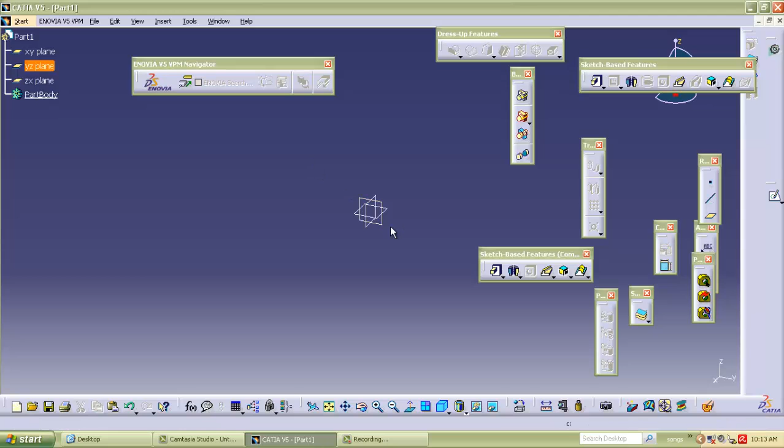First selecting the preferred plane, so I am selecting this XY plane and then making a circle, choosing a circle from the profiles available in this workbench. Then making it constraint, set to 200. You have to make constraints because no design is complete without constraints. Then exiting the workbench, making it 20 mm, and choosing the upper plane.

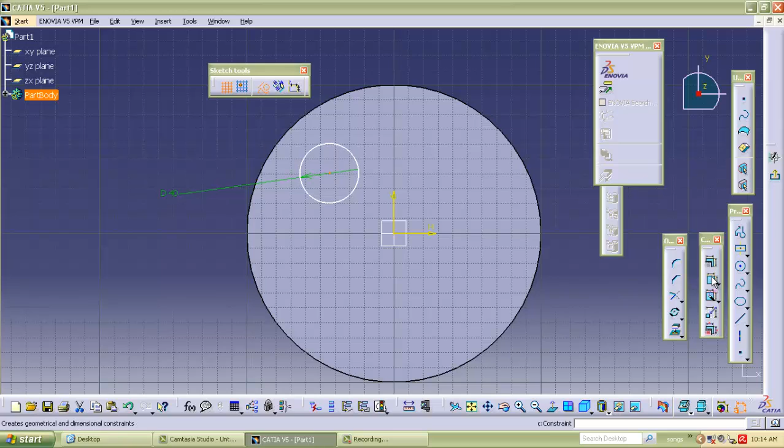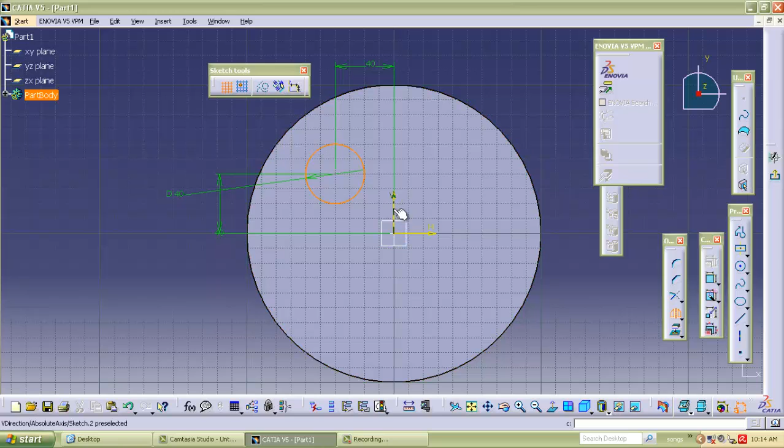Now we are going to make the eyes of this smiley. Making constraint, this one should be 40, and then again making constraint, should be 40, and this should also be 40, making it 40 again. Now using the mirror operation, this uses a sketch which we want to mirror, with this axis, so it gets mirrored and already constrained.

Exiting the workbench, then using this pocketing function and giving it 10 mm. Then selecting the plane inside this pocket and making the eyeball of this smiley, then projecting this part.

It will be projected in the lower plane, you can see this. Now making the eyes of the smiley, setting it to 15 mm and then making it constraint again. Then deleting this projecting part since it's not of use.

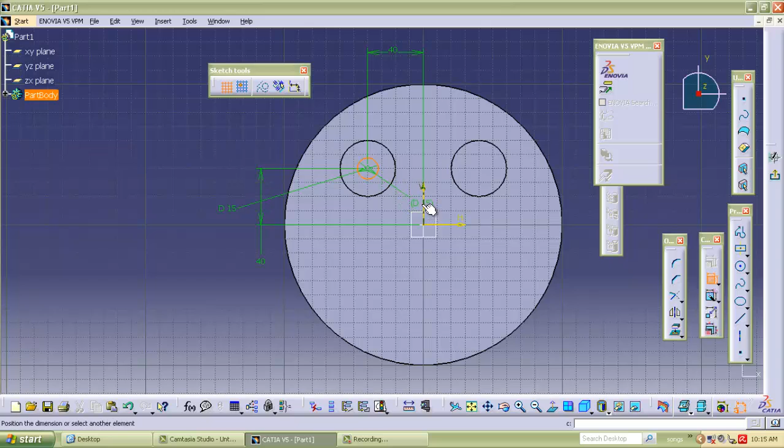Making it mirror about this y axis, when it is already constrained. So using this extrude function with reverse direction, which reverses the direction of extrude, and then setting it to 12 mm.

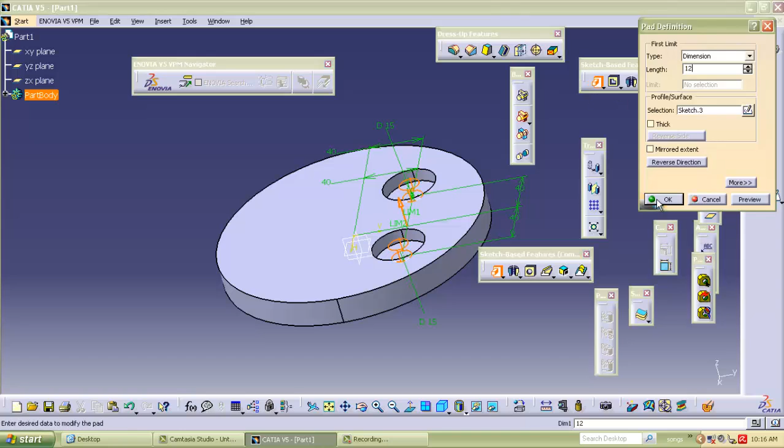Now the eyes are made, so selecting this plane and making the nose. Here we can use a centered rectangle to make the nose of this smiley. So here we choose 45, and this dimension is 16.

Again we have to position it by giving proper constraints. So here we get 8 mm, and then here 22.5 mm, so now it is properly constrained.

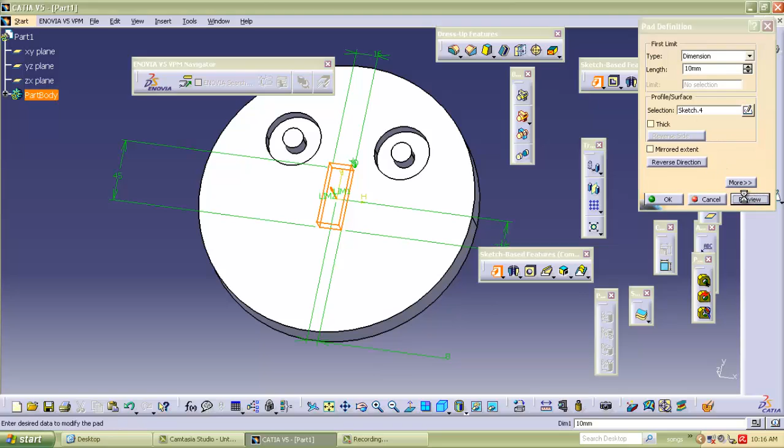Exiting the workbench, then giving it the extrude function, setting it to 10 mm, and here we get this smiley face with the nose, and then giving it a smile.

We can go again to sketch, giving a point. Here we can position the point. This should be 50, 45, and then the other one should be...

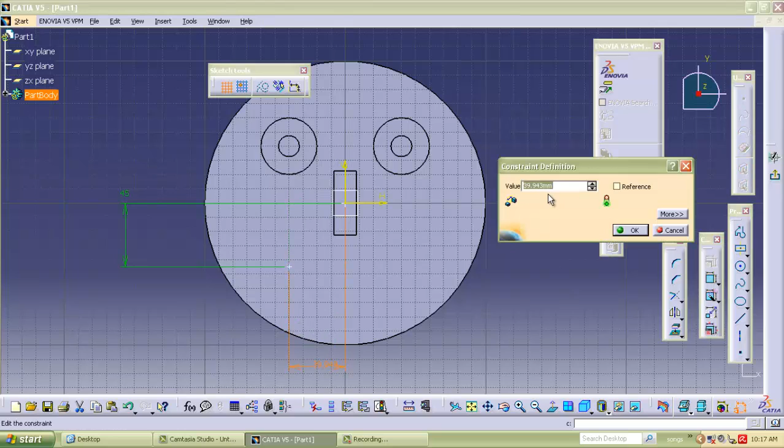Selecting this dimension part, and then this should again be 40. Now this point is positioned.

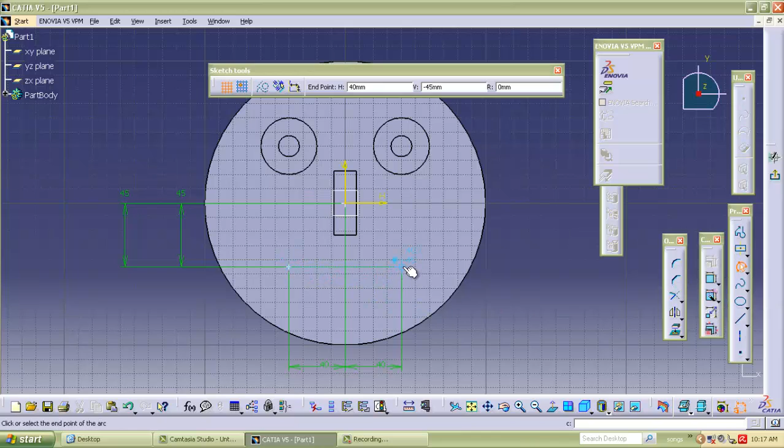Using the mirror command, we can mirror this point, and now we can use a 3-point arc. This 3-point arc starts with limits, because we have to set the limits first, and now we can change the radius, then making it constraint.

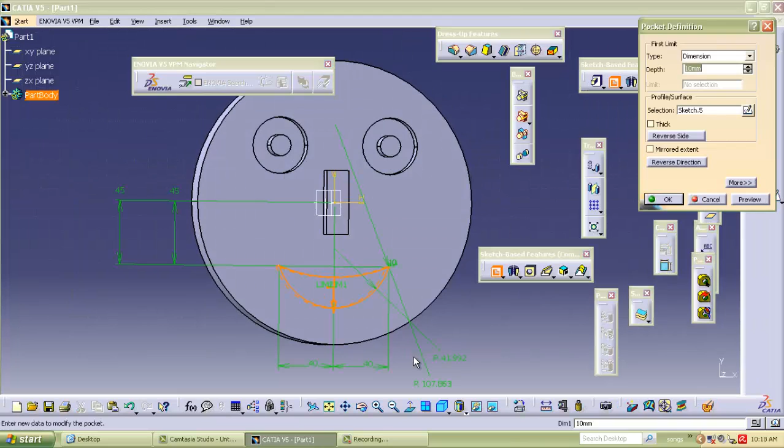Making it constrained again. So here we got the mouth of the smiley, and now we can pocket it to the end, setting it to 20, and we get the pocket.

Now we have completed the face, but we have to dress up this whole smiley face. So selecting this fillet, selecting the edges we want to fillet, we need 7 mm. Previewing it, now it's looking like an eyeball.

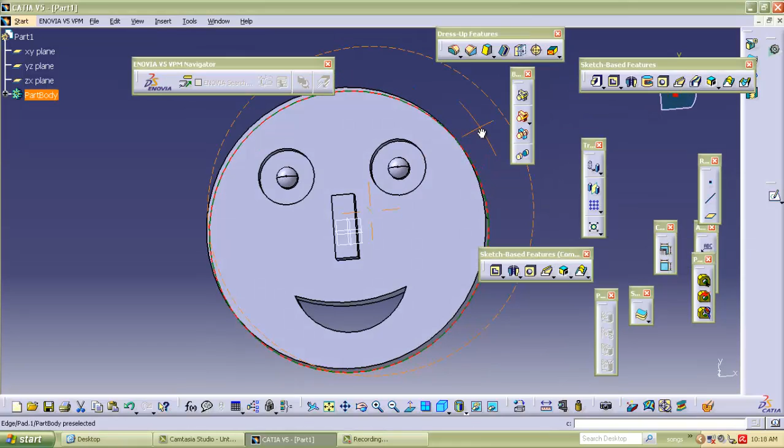Now setting this again, fillet 7 mm.

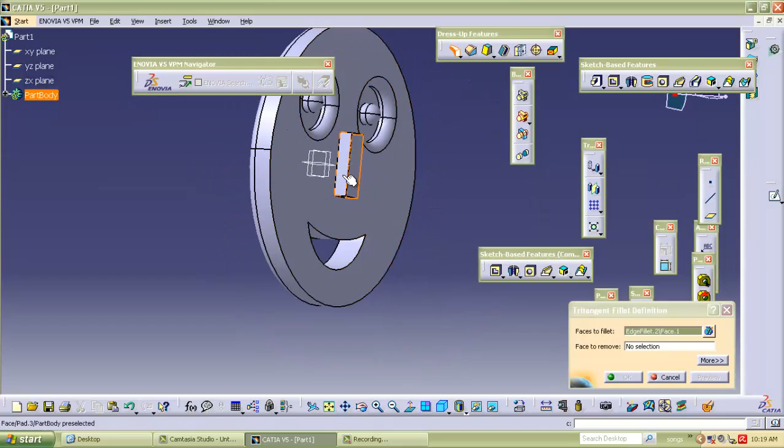Now selecting one more operation because this is not looking like a nose, so giving it a nose-like structure. We have to select the two faces between which we want a tritangent fillet, and select a face which we want to remove. On preview you can see it is removed, so now it is removed.

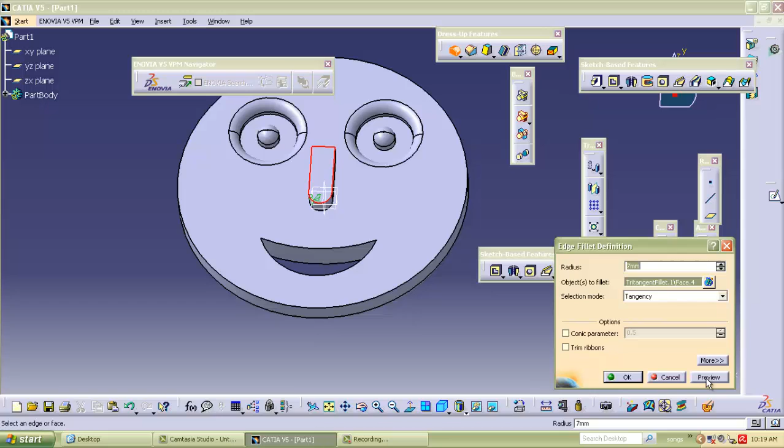Selecting this and again giving it a fillet to make it a cute nose of a smiley. Previewing, and now we get this.

Now setting for machining we want a safety plane also, so making a safety plane. Here we can select a plane.

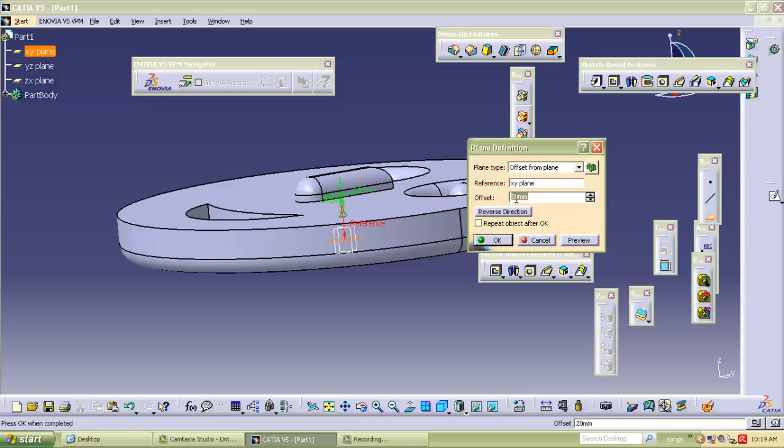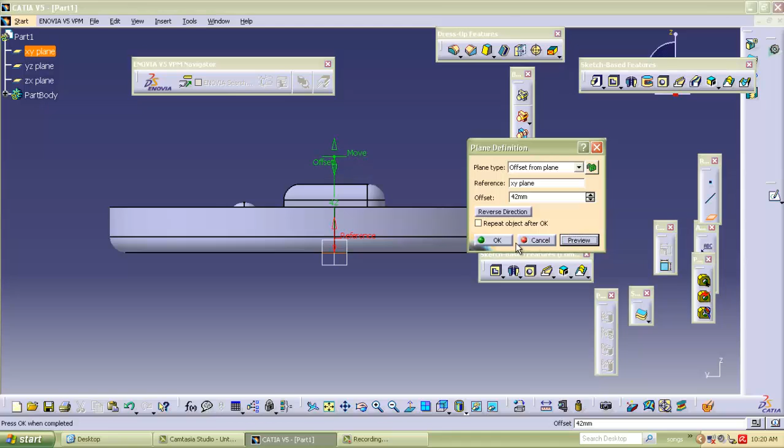Here we can position the plane from here. It is 30 mm, and now when we make a rough stock, it should be 10 mm above, so 40, and then making a 2 mm clearance, so 42. So this will be a safety plane.

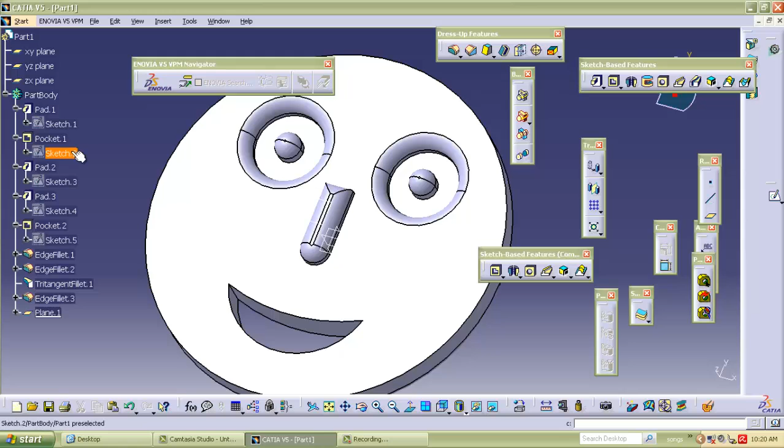Now for machining we want fixtures also, but fixtures we have to make on the rough stock. This is the finished part. So first we can make rough stock here also, and in the machining workbench also. It is better to make it from the machining workbench because it is customized and it reduces the machine time. That's why we are using machining.

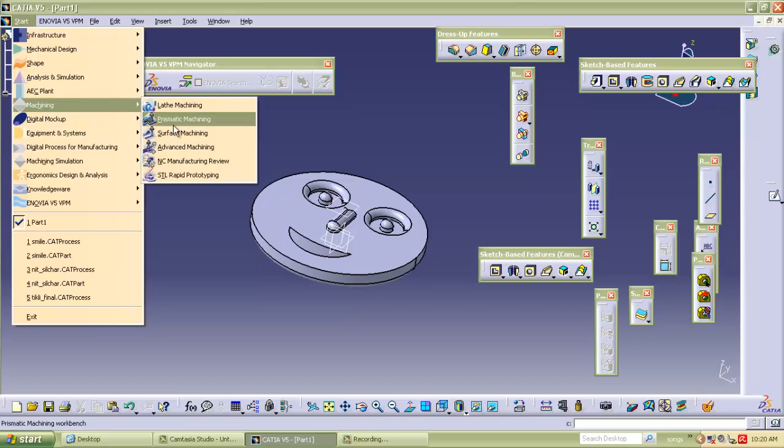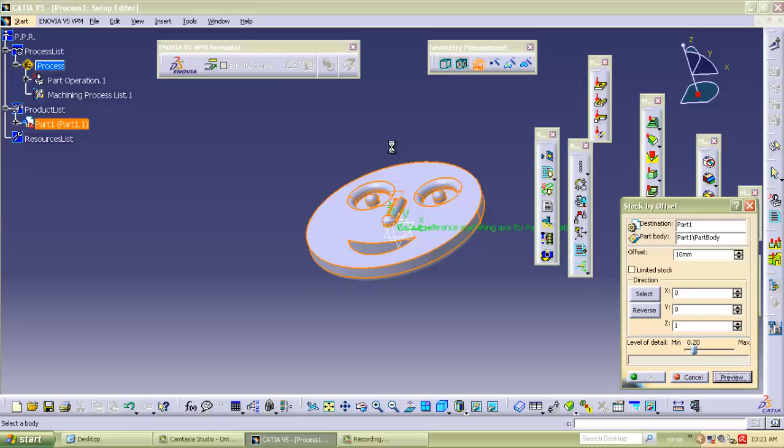We are going to machining workbench, then prismatic machining. So here we have reached in the prismatic machining workbench. Here we can use different types of geometry management to give the rough stock to the part body. So selecting the part body, and selecting this part body in which we want this stock by offset. We have selected the offset 10 mm, then preview. Here we get the desired rough stock, which is machined, and then we get the desired part body.

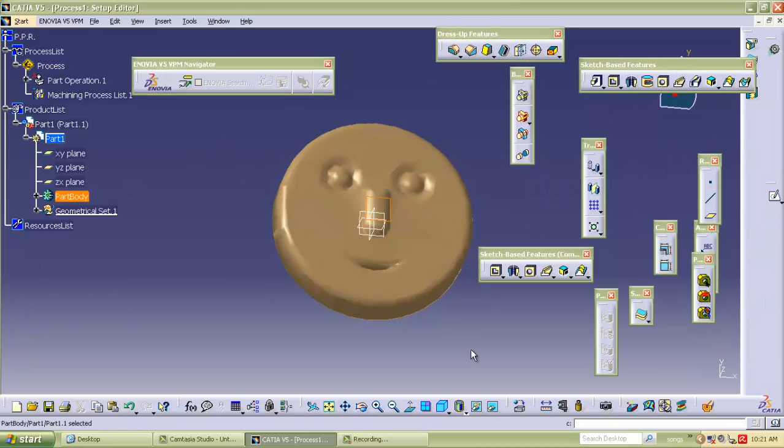Now we want some fixtures also, so again going to this part body. Now we have to select the fixtures, we have to make the fixtures. Then insert one new body, and then we have to make fixtures. So we can make fixtures from here.

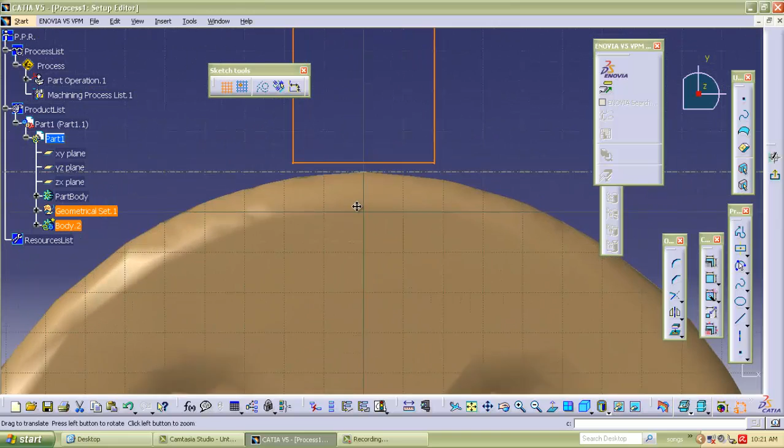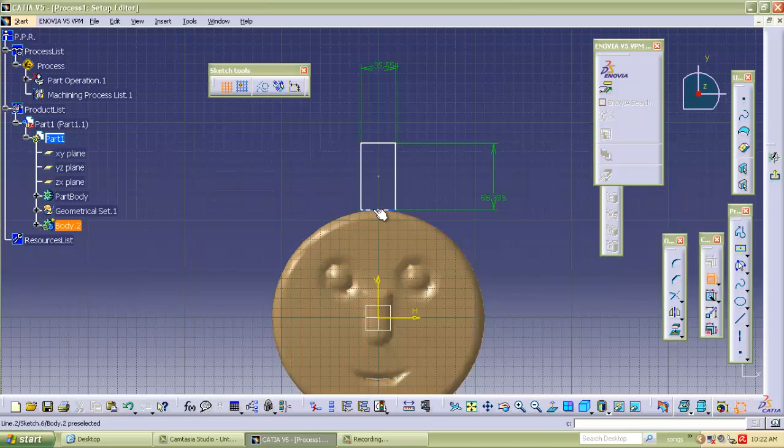Fixtures can be of any dimension, so we are not concerned about fixtures because fixtures are designed differently. So we are using a body like fixture. Here we have to constrain it again, so here constrain the sides and then the position. In the design everything should be constrained.

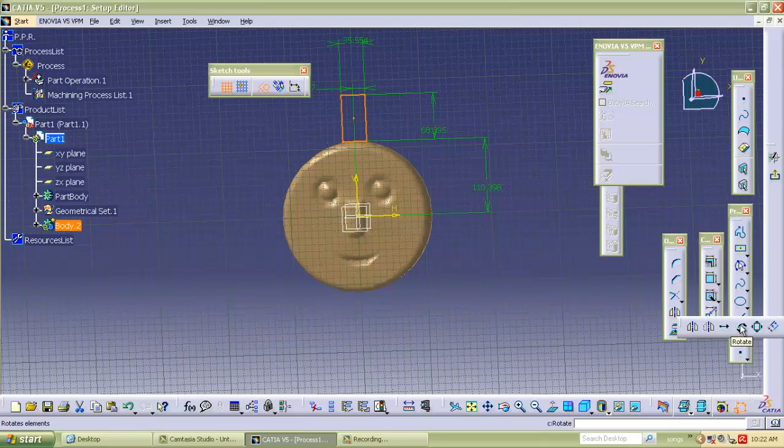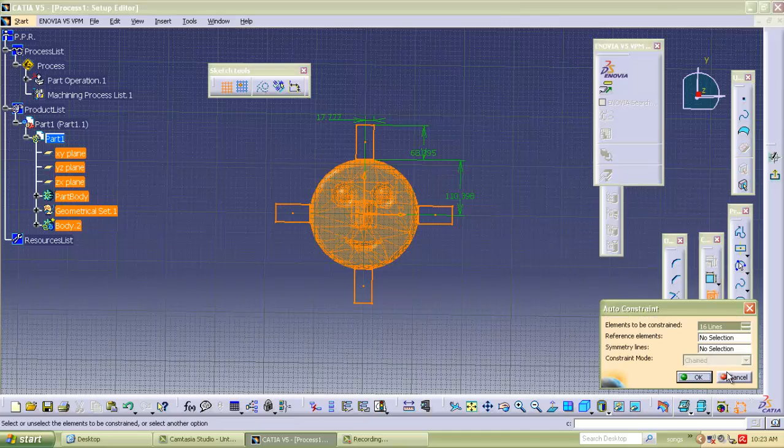Here only one fixture is not sufficient, so similar fixtures are needed. So we can use a rotate feature. Now we can rotate it. We need 3 instances for this. Now all these should be constrained, so using an auto constraint option. This auto constraint is used to constrain all the sketches automatically using stack, and then, okay, these are all constrained. So exiting the workbench.

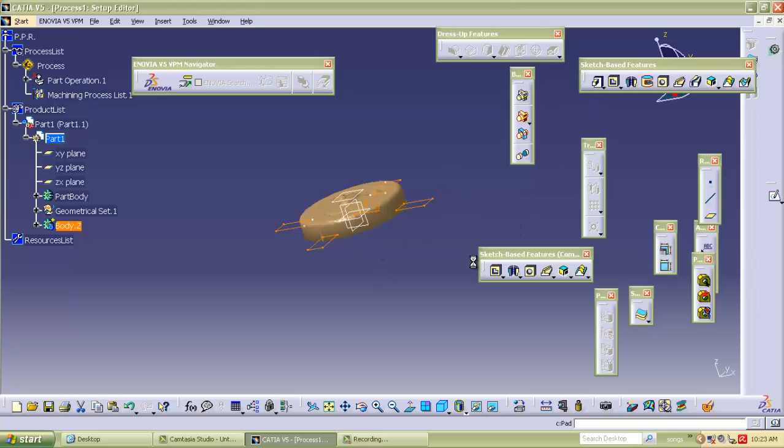So here we can give this extrude of 15 mm to this. So here we got the fixtures and all things, and we are ready to machine. It's like in the actual machining we are ready, all setup is maintained and we are ready for operations.

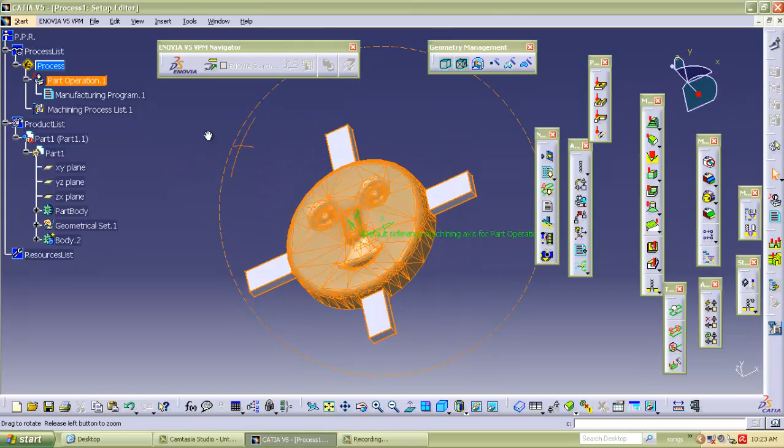So here we have to first give the parameters for the operations. We have to set the type of machine. We are using a 3-axis machine, then this reference machine axis. This reference machine axis is okay with our machining. This is at the center, this one.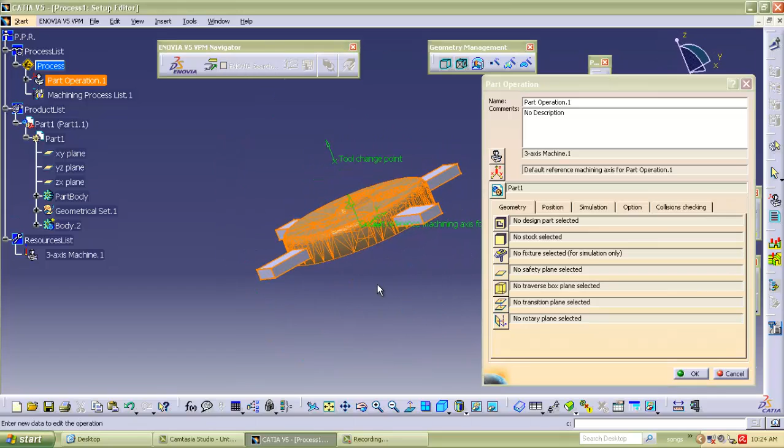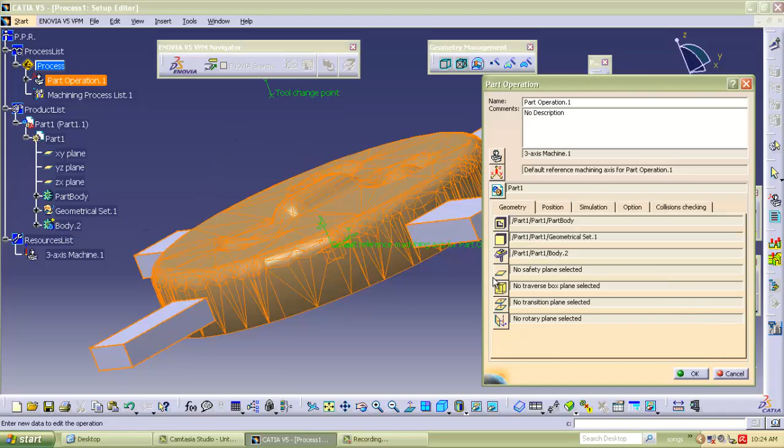We can change this axis from this, and now we have to define which part we want to machine. So part 1 is correct, and then this part body, the machined one, that will be the machine part. This rough stock, that is going to be the rough stock, which can be called a blank, which we are going to give in the machine. And now the fixtures and the safety plane. The safety plane is here, and then all are selected, then clicking OK.

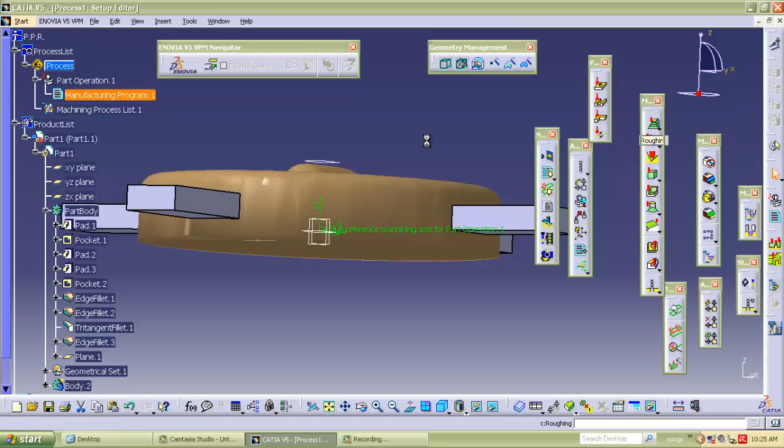Now we have to select the operations which we want to do. So first selecting the roughing operation. This roughing operation is going to open. So here we have to set different parameters like rough stock. We have selected this one as the rough stock, and now the part body is this one, and this check is the fixtures.

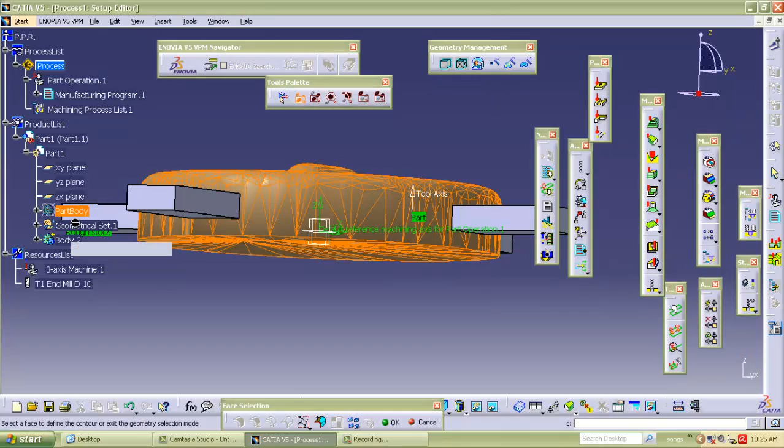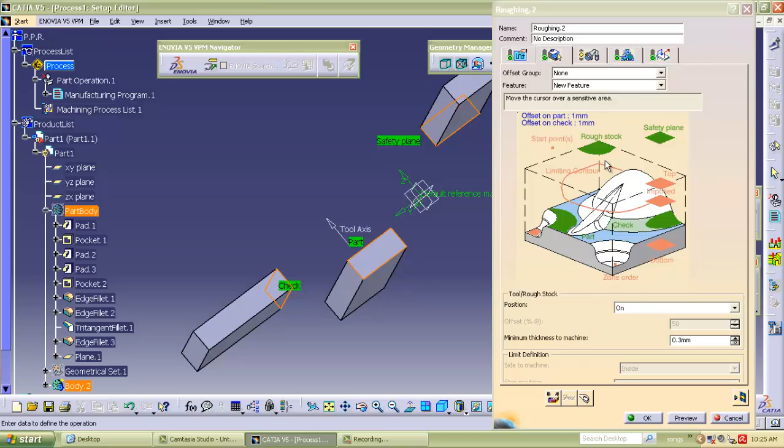So we have to hide this to define in the checks. So here we have defined the checks, which are the fixtures. The safety plane is here in the part body, this one is the safety plane, and now we have to check. We have to give the offset for how much the roughing operation is going to machine. So this offset is on the fixture. We have to set it to 10 mm, because the rough stock is 10 mm offset from this part body. So selecting offset of 10 mm.

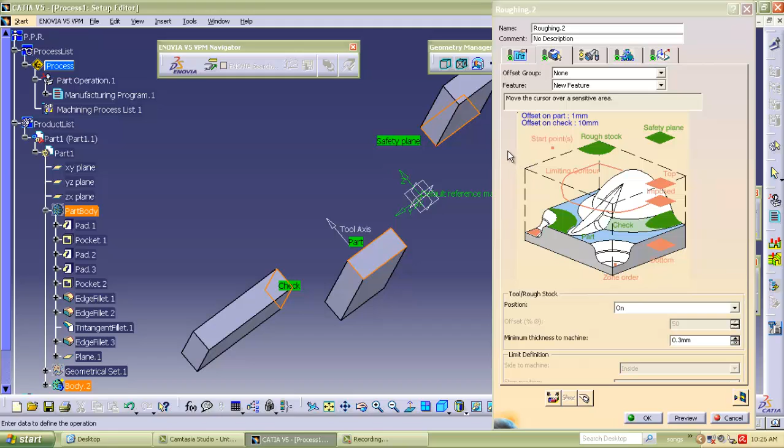Now we have to select different parameters for how it's going to machine. So its machining mode is by area, and it's outer part and pocket, which is okay. Then we are going to use helical tool path style. Machining tolerance is 0.1 mm, that's okay. Then climbing cutting mode is climbing, which is a conventional mode we are going to use in machining. And then helical mode, and then radial overlap tool. Then we have to set this step over length, which is decided after we set this tool dimension.

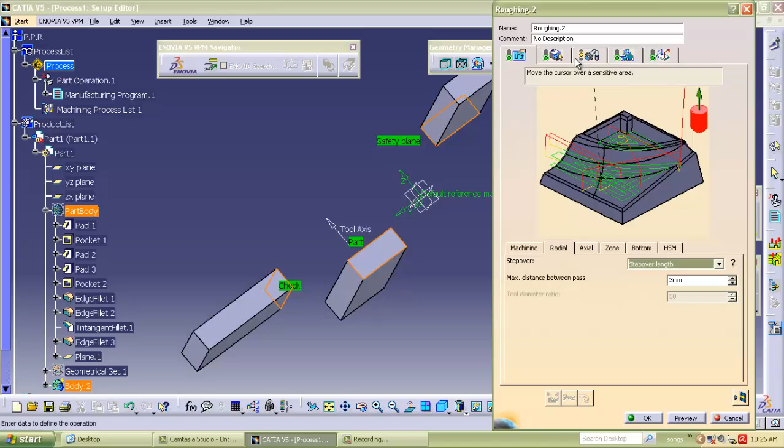So for this roughing operation we have to set these parameters.

For the roughing operation, we don't want a ball nose tool, so we are selecting a zero radius end tool. Here we have to select this dimension - the diameter of this tool is 8 mm. Now that we have selected this 8 mm diameter, we can select the step over. Step over is always 50%, so for good machining we are selecting 4 mm. Then maximum cut of depth - since we have 8 mm, we set the maximum cut of depth to 3 mm.

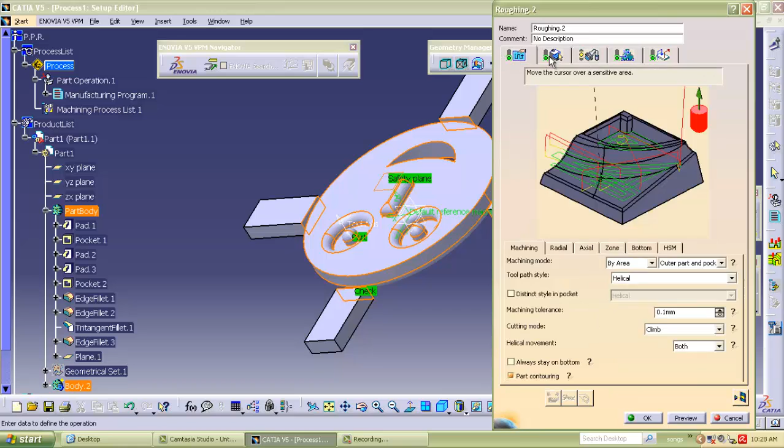So after selecting all the parameters, we can set all these parameters, but we are not actually machining this - it is only a practice video. So then executing this, it will generate a path for this tool movement.

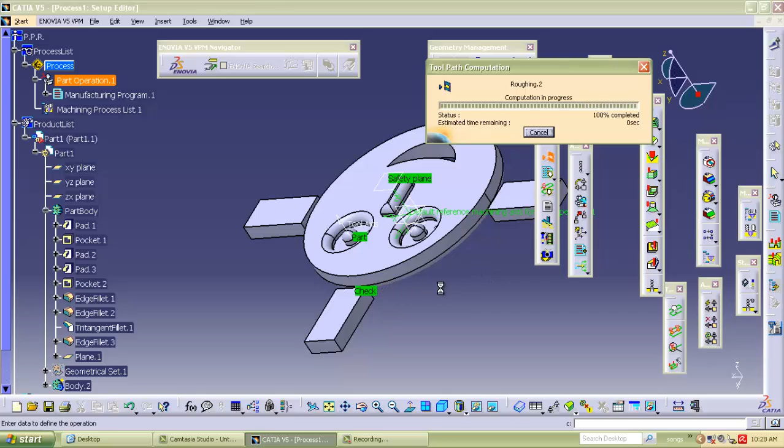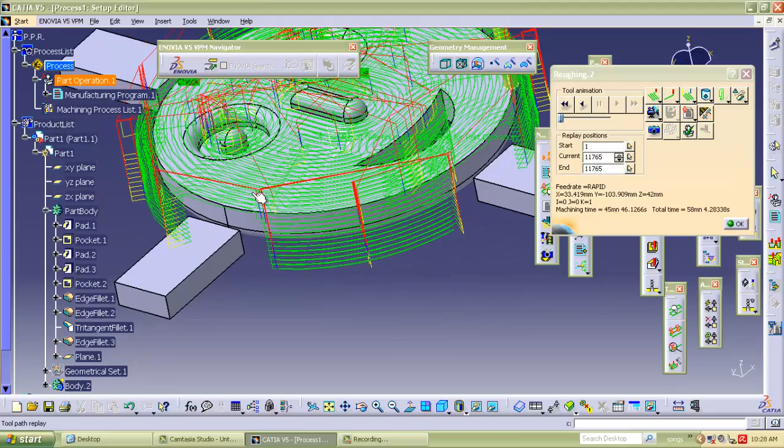So you can see here a path is going to generate. This is a tool path. So here we can see this green one is the cutting portion, where the tool will cut the metal, and this red part is air cut. It is the time in which the tool will not cut, so it is wasted time. We have to reduce this time.

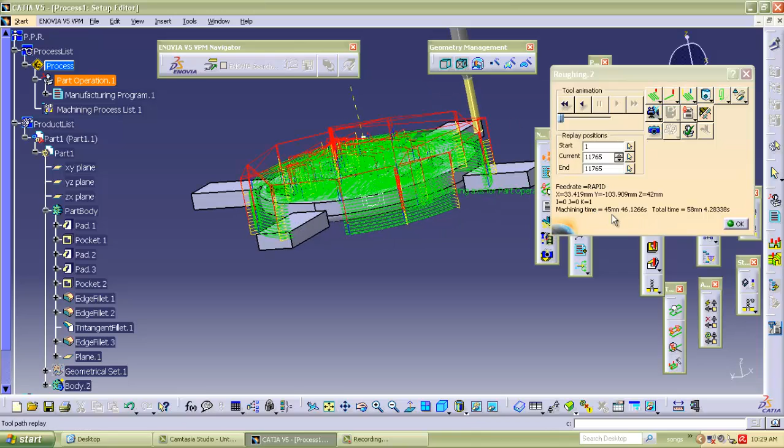So we have to do machining properly, we have to choose the path properly to reduce this machining time. We can see here 45 minutes is taken by this roughing operation. So again for other operations we have to do this. After selecting this roughing operation, we can select other operations.

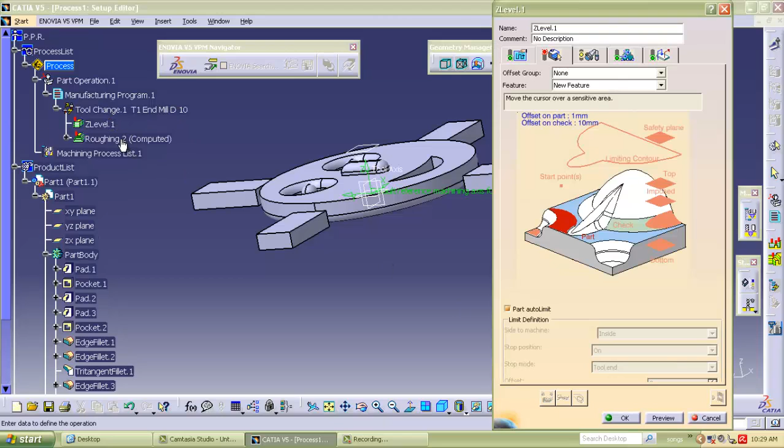The next operation will be Z level. Here we can see different operations are there. So selecting Z level, this one is Z level. Z level should be the second one. So here we have selected the Z level.

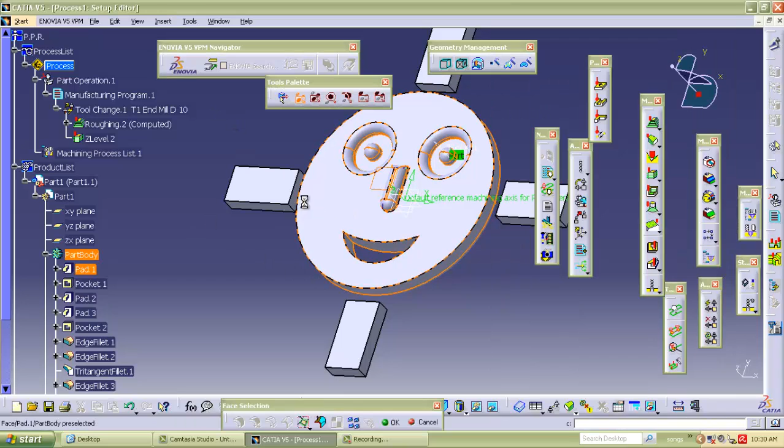So here, selecting, no rough stock is needed because this is a finishing operation. We have to select the part body, then check geometry. So hiding this one and selecting the checks. After that we have to select a safety plane - in the part body we have the safety plane, and now these are the different parameters which we have to set.

First we have to give the machine part offset 0 because this is a finishing operation, and then offset on check should be 10 mm because these are the fixtures. And then all these parameters which are default, we are going to leave as they are, which are okay. Then pass overlap we have to set, and offset on tool path - all these parameters we have to set.

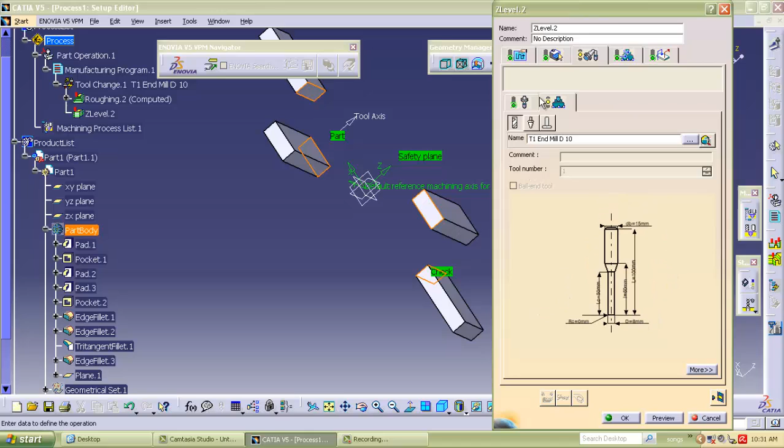But before that we have to change this tool. This tool should be 8 mm, so it's okay. Now we can use this for Z level. Then setting the other parameters - pass overlap should be 3 mm, then offset on tool path should be 4 mm, and zone maximum horizontal shape - all these are outputs we can set.

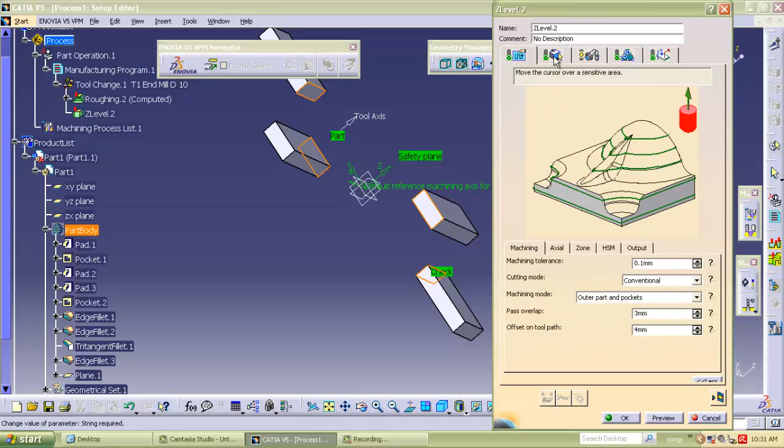The distance between passes we can set to 1 mm, step over should be constant, and now we can generate the path. First we have the part auto limit, which automatically sets the limits. So we have to uncheck this. Now we can generate the path.

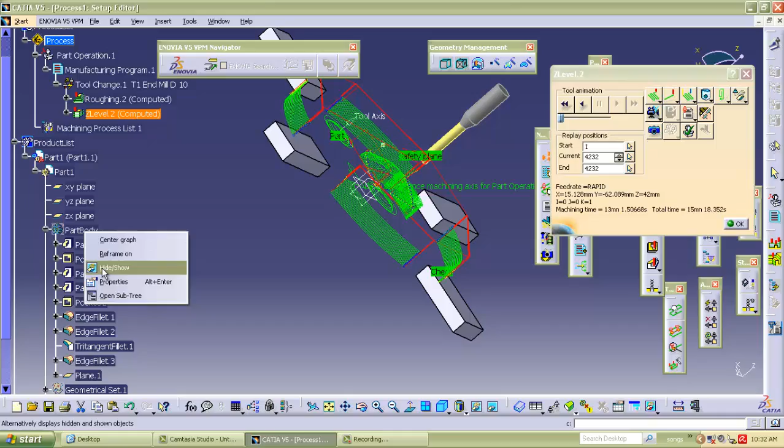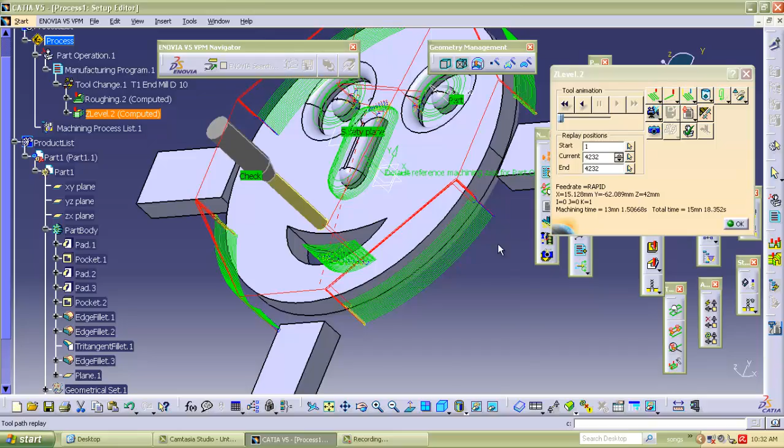Now the path is generated. We can see that it is machining only the vertical faces, and that's the original meaning of this Z level. So it's complete, and this red part is air cut, and this green part is machining.

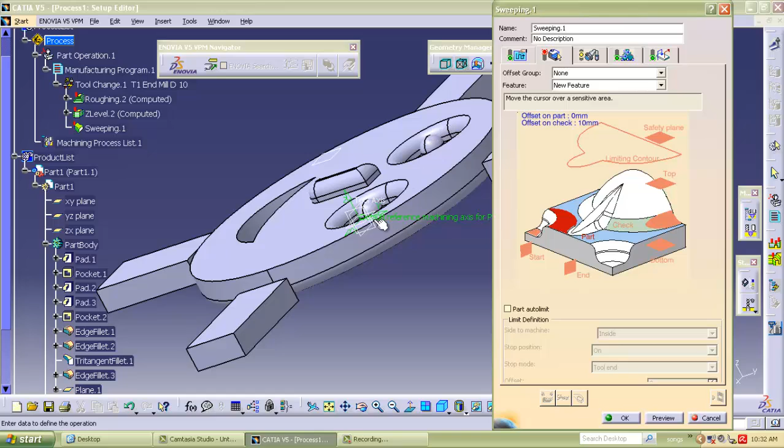So now selecting the other operation, which is also a finishing operation - this sweeping operation. This operation is used for finishing all these profiles like this one. It gives very minute cuts, and it is used when we have to make surfaces, like wavy surfaces - any surface we can machine, we give a finishing cut from this surface.

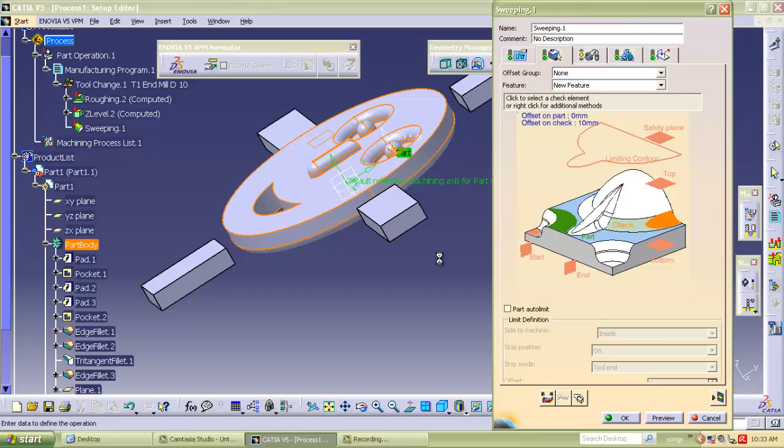Selecting the part body, now selecting the checks, so hiding this, then check - selecting check. These are the fixtures.

This offset is 0 also, and offset on check is 10 mm. Now selecting this machining tolerance, we have to select for better finish. Maximum distance between passes 1, then scallop height, step over side, all axial maximum levels, selecting 2 levels.

Setting all the parameters and then changing the tools. This tool we have to change, so now selecting other tool. We are going to use a radial tool, a ball end tool. Cancel this, use a ball end tool, and select this 6 mm.

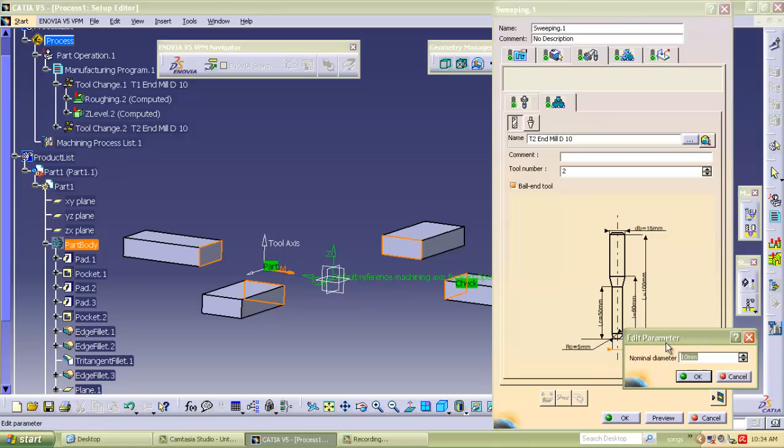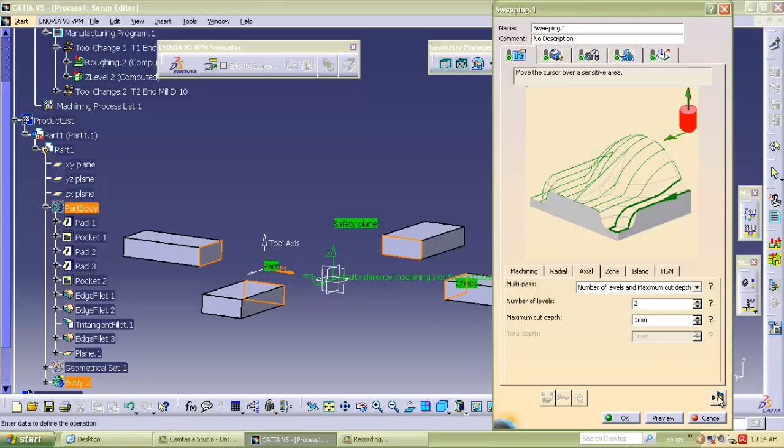Now we are ready to execute this file. This safety plane is not set, so we have to select the safety plane. So all these parameters are set. Now we can execute to generate the machining path.

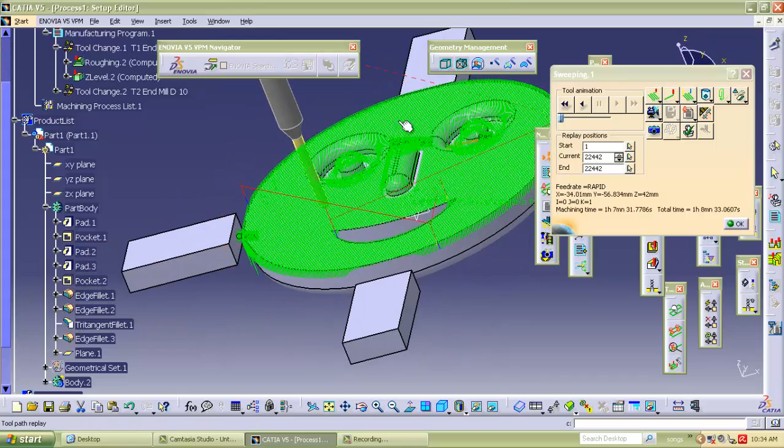So here we can see the sweeping operation tool path is generated. This red is denoting the air cut, and this green one is the machine cut. So this 1 hour and 7 minutes is taken by this operation. Here the whole things are generated, you can see.

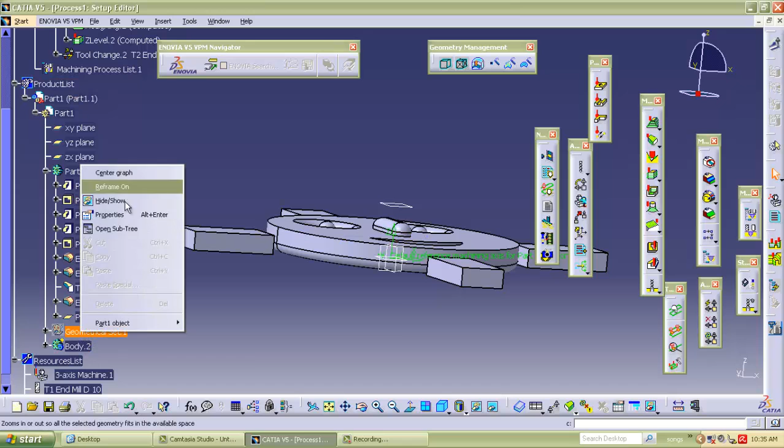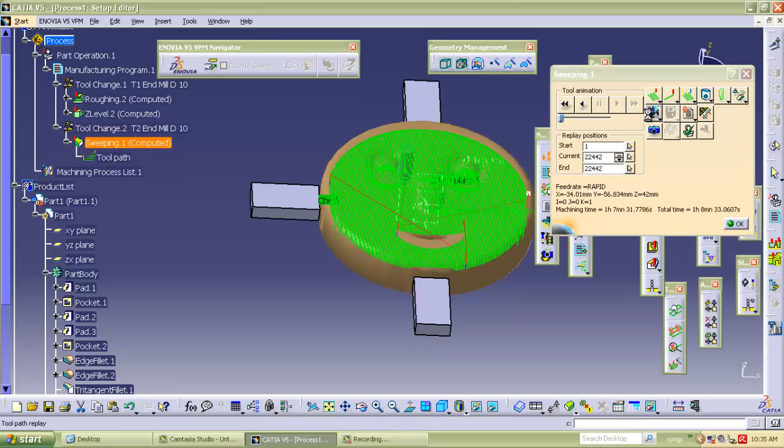To preview this machine operation, we can use this command. In sweeping we can go to this tool path replay, and then video from last saved result. On going to this video part, we can see how this machine is going to happen, and we can change the machining paths so that no accident happens during machining. We can also fast forward this machining time.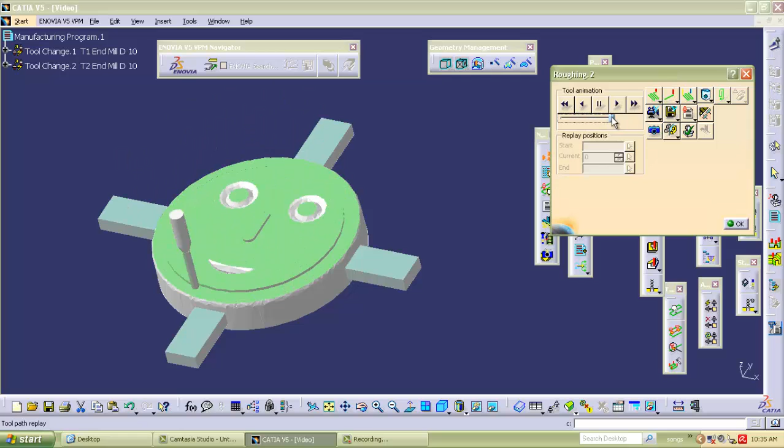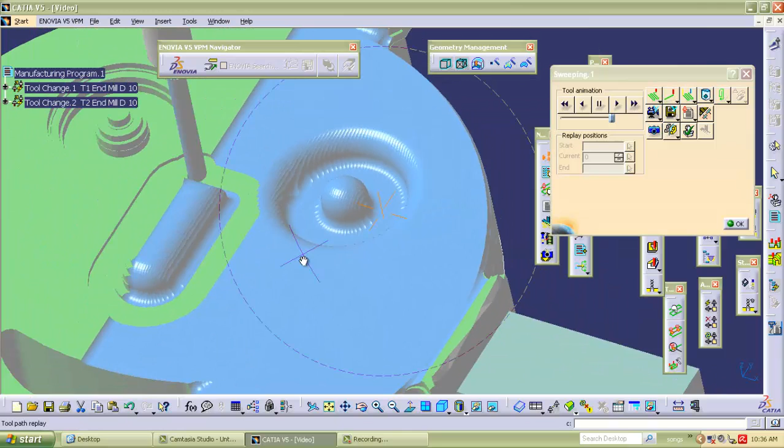So here you can see how machining is going. This is a roughing operation, that's why. And now this sweeping operation is done. You can see here how this finish is accurate and good. This is the first level, so the second level is left.

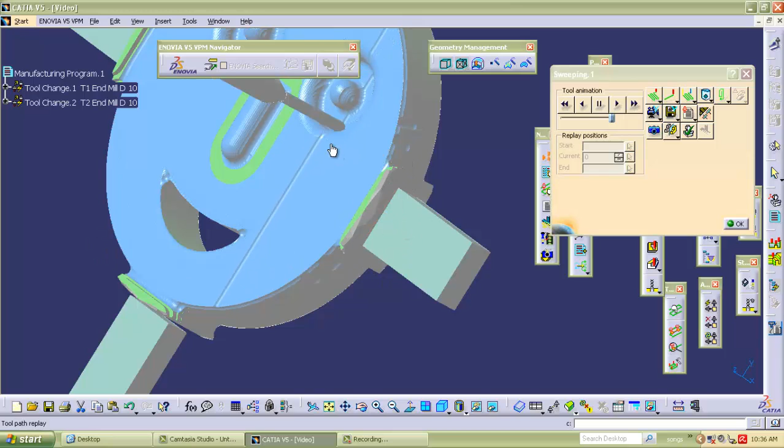You can see here these fixtures are left as it is. Now this fixture part, this useless part, can be removed in the second setup. This is only the first setup to maintain the upper plane, the upper face.

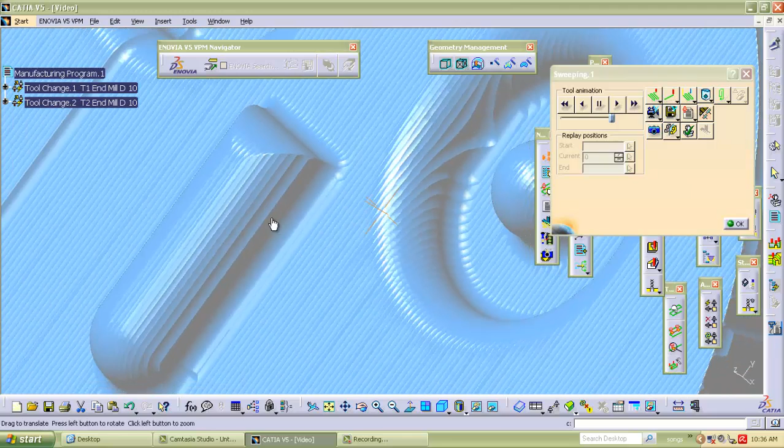You can see this operation, how correctly finished this is. We can reduce the step over length and the size of tool to get a better finish. Now this is the finished part.

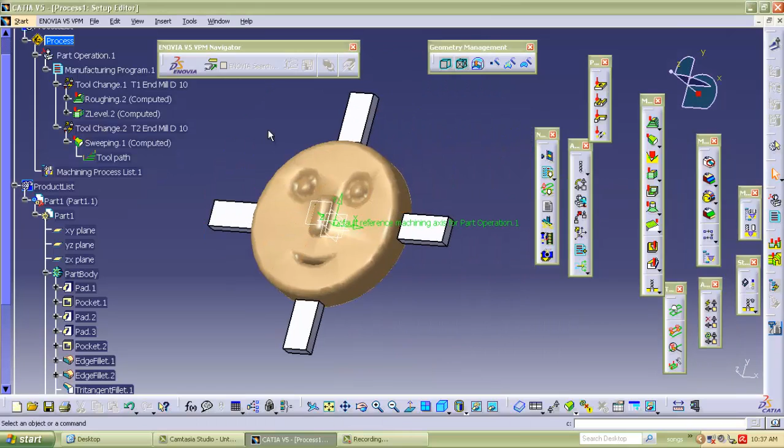So now for generating this similar part in a machine, we can generate an NC code and give it to the machine, and the similar smiley face we can get in our real life.

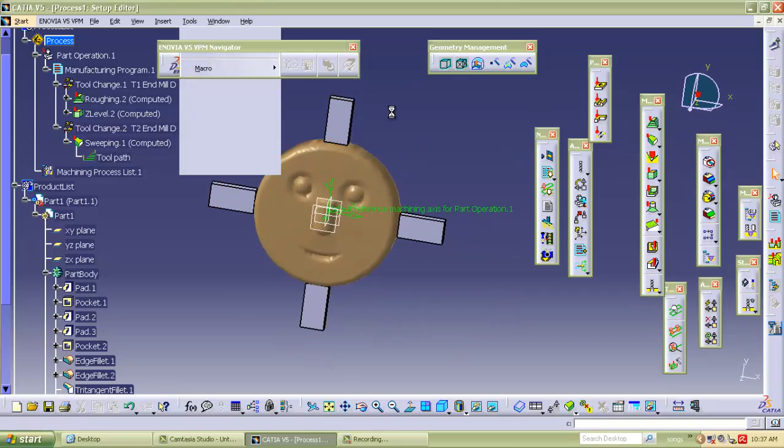So first we have to set which software we are going to use for NC coding. In tools we can go to machining, and then in output here the post processor and controller emulator folder. We have to select out of these three, which are softwares in collaboration, compatible with CATIA V5.

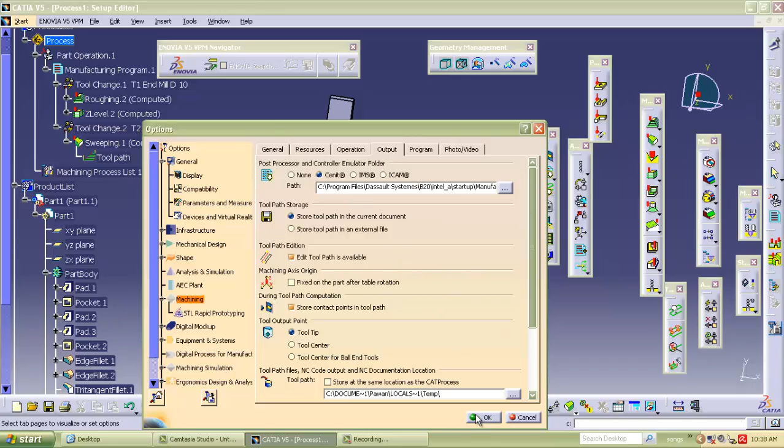So selecting this Cenit®, and then going to this, you can see NC output management. Here we can go to generate NC code in batch mode. Before doing this, we have to save all these processes, because this needs an input which is saved.

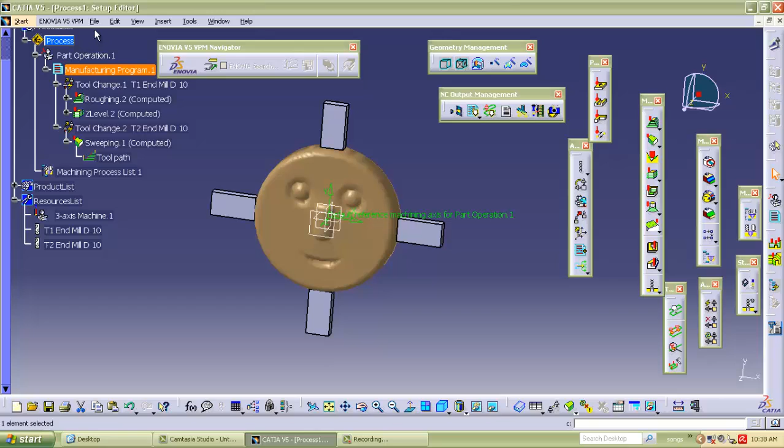So saving this, save, desktop, smiley, save, yes.

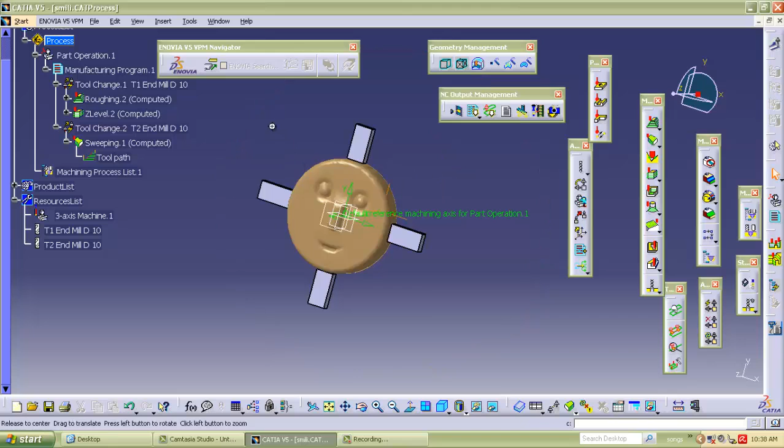Okay, now this smiley is already made. Now this is saved also. Previously it was blank and it is already filled now. Now we can select this NC data type, so we are using NC code, and now we can decide the location where we want to store this.

This is in temporary files, so selecting it in desktop, selecting OK. Now this execute part is not highlighted because we have not defined which post processor file, Cenit post processor file, we are going to use. We have decided Cenit, you will see in the options.

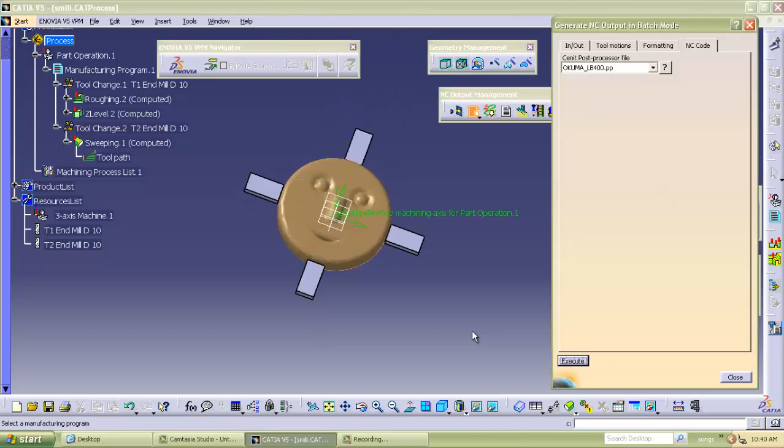So we can use different controllers depending upon the machine. Now we can execute this. Okay, on executing, here all these NC codes are generated here, you can see. So these NC codes are written in NC data, this cat NC code.

So opening this in notepad, you can see here different coordinates are there. These are only the coordinates according to which the machine gets the coordinates and cuts the face. So here we get this all smiley.

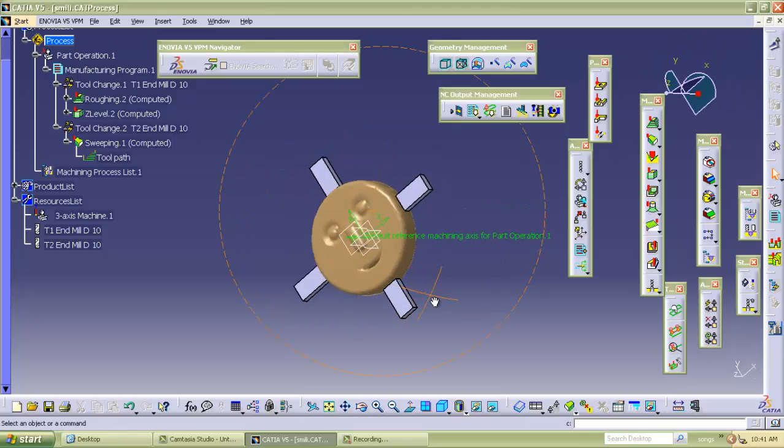This is a new method which is used in the industries to generate various models automatically using machines, NC codes and CATIA V5. So thank you.